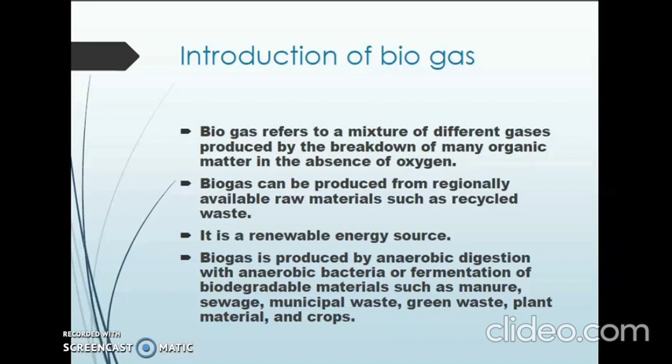Biogas refers to a mixture of different gases produced by the breakdown of organic matter in the absence of oxygen. Biogas can be produced from regionally available raw materials such as recycled waste, and it is a renewable energy source. Biogas is produced by anaerobic digestion with anaerobic bacteria or fermentation of biodegradable materials such as manure, sewage, municipal waste, green waste, plant material and crops.

Let's check into its history. The idea that rotting vegetable matter gives off a flammable gas has been understood since the ancient Persians. In modern times, the first sewage plant was built in Bombay in 1859, an idea that was brought to the UK in 1895 when the gas produced was used to light street lamps. The use of farm manure to generate methane was developed again in Bombay in the 1930s. It was only developed for use by Indian villagers by the Khadi and Village Industries Commission in the early 1960s.

Similarly, China started a program in the 1960s and claimed that 5 million plants had been built by the early 1980s. The design was based on a septic tank.

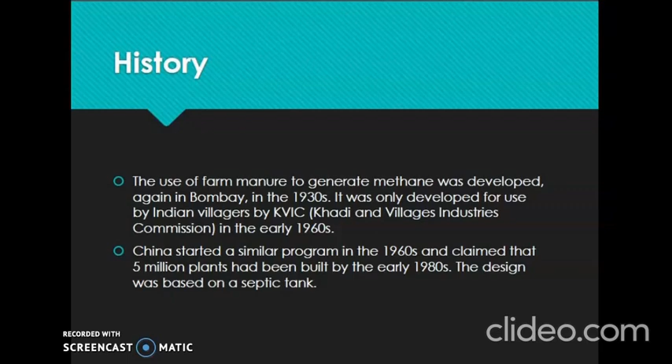Biogas composition: methane makes up 50 to 75% of the biogas composition, followed by carbon dioxide at 25 to 50%, nitrogen 0 to 10%, hydrogen 1 to 5%, oxygen 0.1 to 2%, water vapor between 0 to 10%, hydrogen sulfide 10 to 30,000 parts per million, and ammonia in the range of 0.01 to 2.5 milligrams per meter cubed.

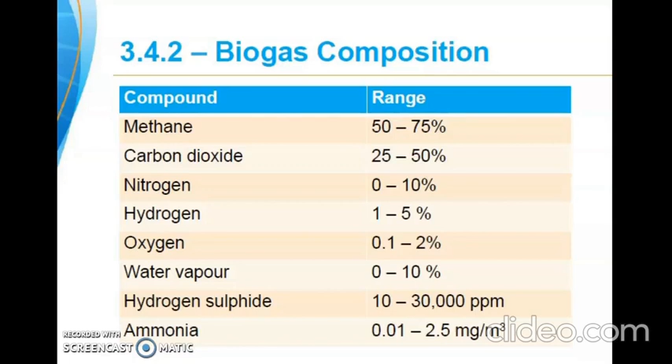Now let's see the typical biogas yield depending upon the feedstock used. When mixed food waste was used, it's between 75 to 200 meter cube per ton. Cattle slurry is between 15 and 25, and same with pig slurry. For poultry litter, it's between 30 and 100, and grass silage is between 160 and 200. If it is maize silage, it's between 200 and 220, and if it's maize grain, it's 560.

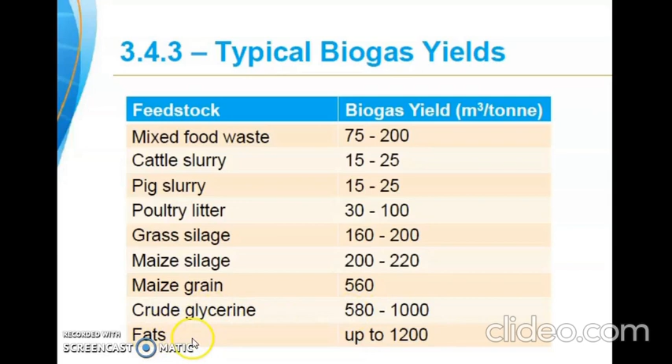When crude glycerin is used, it's between 580 and 1000 meter cube per ton, and the highest was seen when fats were used, ranging up to 1200.

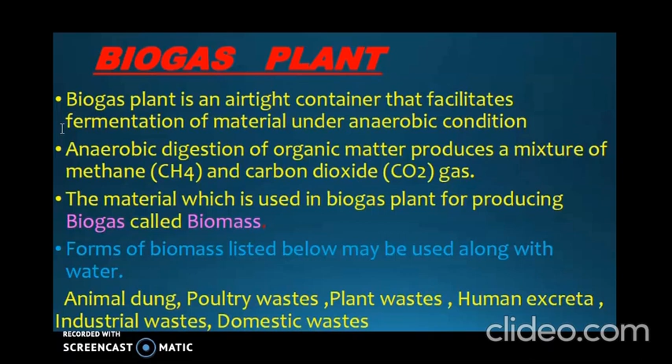So what's a biogas plant? A biogas plant is an airtight container that facilitates the fermentation of material under anaerobic condition. Anaerobic digestion of organic matter produces a mixture of methane and carbon dioxide gas. The material used in a biogas plant for producing biogas is called biomass. Animal dung, poultry waste, plant waste, human excreta, industrial waste and domestic waste are the various forms of biomass that can be used along with water in the biogas plant.

Operational parameters of a biogas plant. The first factor is temperature. Methane forming bacteria works best in a temperature range between 35 to 38 degrees Celsius. The gas production decreases sharply below 20 degrees Celsius and almost stops at 10 degrees Celsius.

Solid to moisture ratio in the biomass: if water content is too high, the mean slurry temperature and gas production drops. If water content is too low, acids accumulate and hinder the fermentation process.

Next is the pH value. During the methane forming stage, pH value is maintained between 6.5 to 7.5.

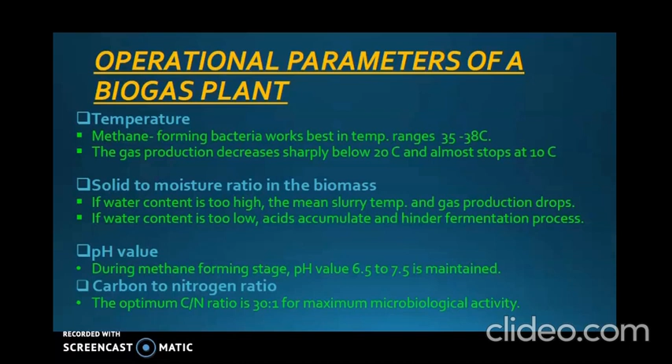Carbon to nitrogen ratio: the optimum carbon to nitrogen ratio is 30:1 for maximum microbiological activity. The total solid content in the material is 18 to 20%, and the diameter to depth ratio is 0.66:1. Uniform feeding of the biomass should be provided, and mixing, stirring, or agitation of the contents of the digester is required.

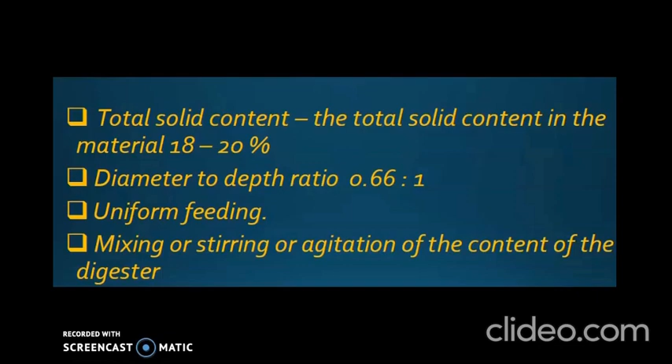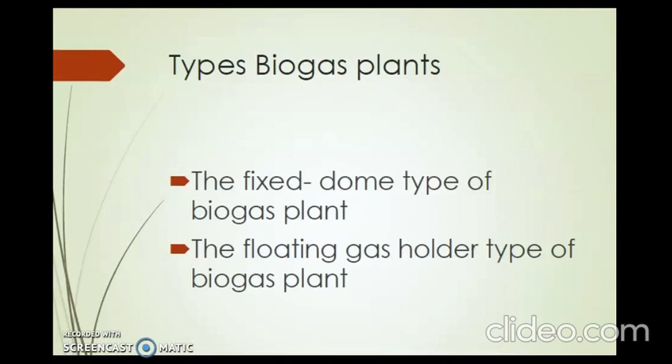Now let's see in detail about the fixed dome type of biogas plant. The raw materials used are animal dung, poultry waste, plant waste, human excreta, industrial waste like sawdust, waste from food processing industries, and domestic waste like vegetable peels and waste food materials. It can be used along with water.

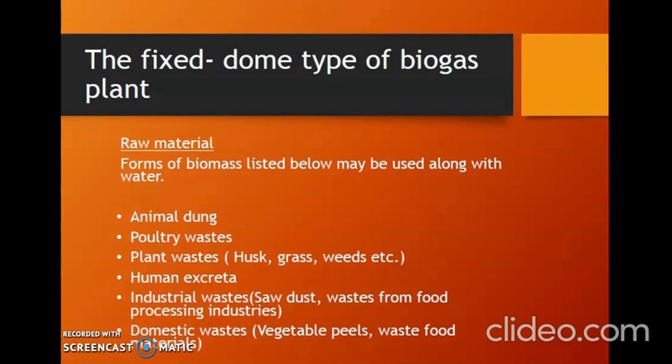In the fixed dome type, biogas is produced as a result of anaerobic fermentation of biomass in the presence of water. The construction of a fixed dome type biogas plant consists of 5 major sections: the mixing tank present above the ground level, the inlet chamber into which the mixing tank opens underground as a sloping inlet chamber, the digester, the outlet chamber, and the overflow tank.

The fixed dome type biogas plant is a brick and cement structure. It consists of a mixing tank present above the ground level, and the mixing tank opens underground into a sloping inlet chamber. The inlet chamber opens from below into the digester, which is a huge tank with a dome-like ceiling. The ceiling of the digester has an outlet with a valve for the supply of biogas. The digester then opens from below into an outlet chamber, and the outlet chamber opens from the top into a small overflow tank.

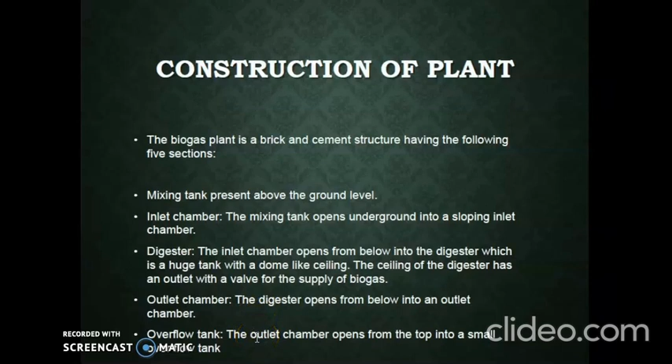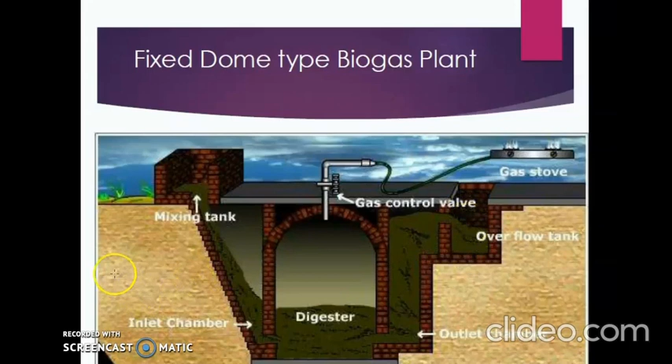You can see the mixing tank, inlet chamber, digester, outlet chamber and the overflow tank here. Now let's see the working of the fixed dome type biogas plant.

The various forms of biomass are mixed with an equal quantity of water in the mixing tank. This forms the slurry, and the slurry is fed into the digester through the inlet chamber. When the digester is partially filled with the slurry, the introduction of slurry is stopped and the plant is left unused for about 2 months.

During these 2 months, anaerobic bacteria present in the slurry decomposes or ferments the biomass in the presence of water. As a result of anaerobic fermentation, biogas is formed which starts collecting in the dome of the digester.

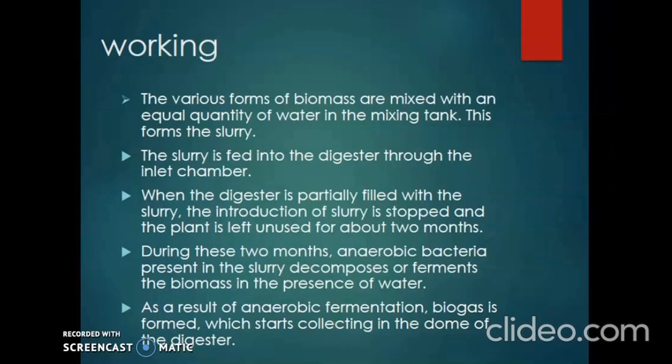As more and more biogas starts collecting, the pressure exerted by the biogas forces the spent slurry into the outlet chamber. From the outlet chamber, the spent slurry overflows into the overflow tank. The spent slurry is manually removed from the overflow tank and used as manure for plants.

The gas valve connected to a system of pipelines is opened when a supply of biogas is required. To obtain a continuous supply of biogas, a functioning plant can be fed continuously with the prepared slurry.

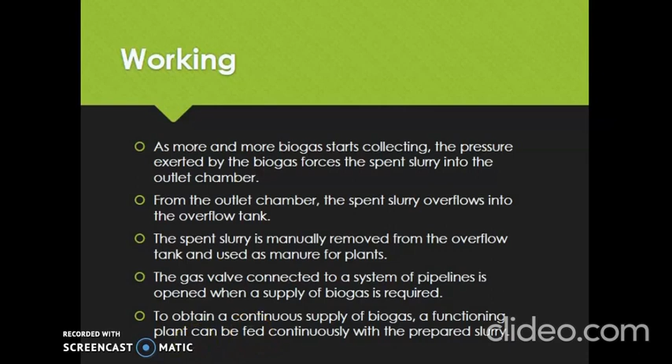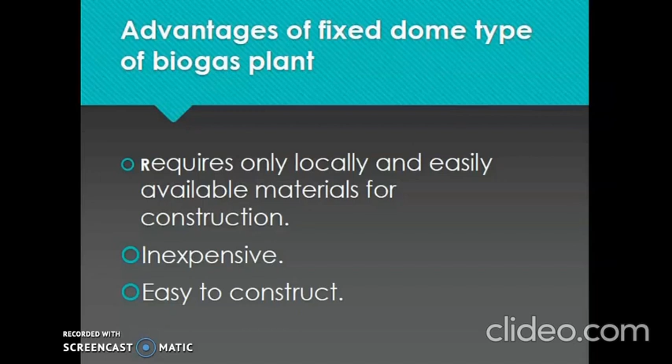Advantages of fixed dome type biogas plant: it requires only locally and easily available materials for construction. It's inexpensive and it is easy to construct.

The second one is a floating dome type biogas plant. You can see the image here. This also consists of a mixing tank, inlet pipe, digester tank, inlet tank, and there is a partition wall in between, and there is an outlet pipe, overflow tank, the gas holder and the gas control valve.

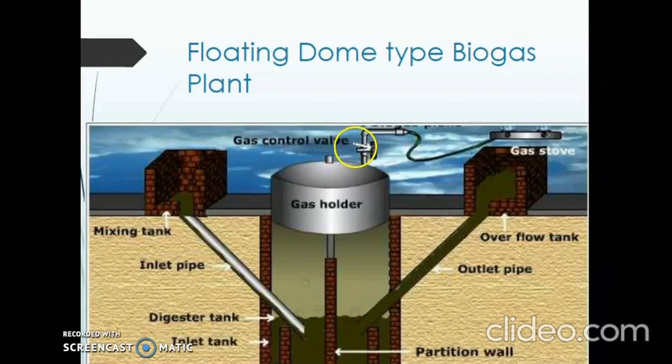Now let's see its construction in detail. In floating gas holder type also, the biogas is produced as a result of anaerobic fermentation of biomass in the presence of water.

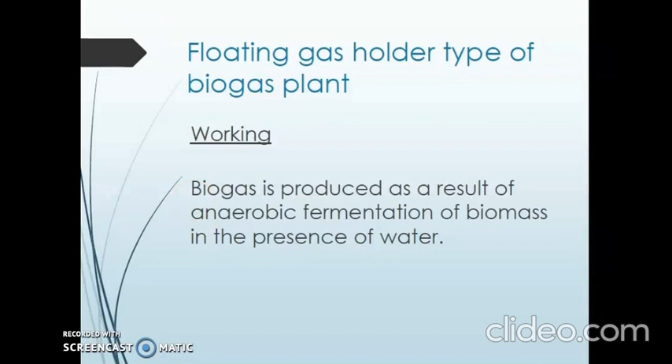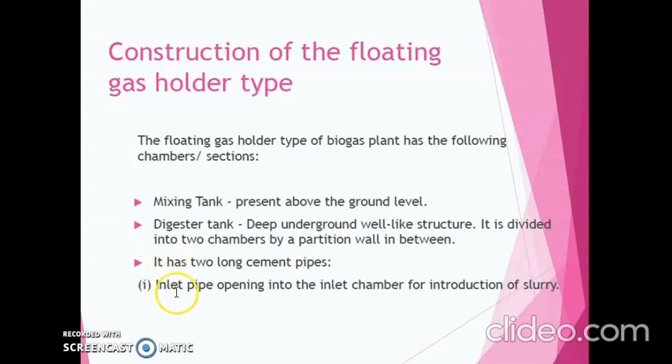Beside that, it has 2 long cement pipes. The first one is the inlet pipe that is opening into the inlet chamber for introduction of slurry, and the second one is the outlet pipe opening into the overflow tank for removal of spent slurry.

Then there is a gas holder, which is an inverted steel drum resting above the digester. The drum can move up and down, and they can float over the digester. The gas holder has an outlet at the top which could be connected to gas stoves. And then there is an overflow tank present above the ground level.

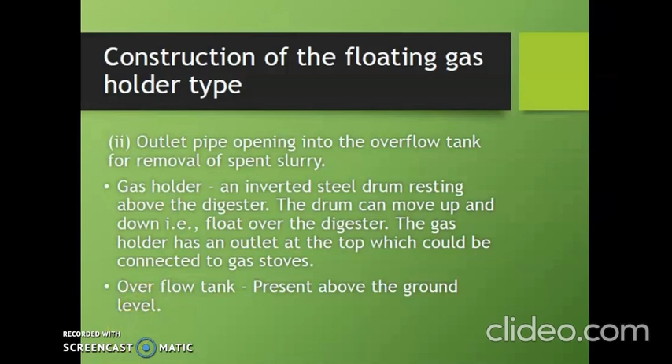Now let's see the working of the floating type. In this, the slurry, which is a mixture of equal quantities of biomass and water, is prepared in the mixing tank. The prepared slurry is fed into the inlet chamber of the digester through the inlet pipe. The plant is left unused for about 2 months and introduction of more slurry is stopped.

During this period, anaerobic fermentation of biomass takes place in the presence of water and produces biogas in the digester. Biogas, being lighter, rises up and starts collecting in the gas holder. The gas holder now starts moving up. The gas holder cannot rise up beyond a certain level.

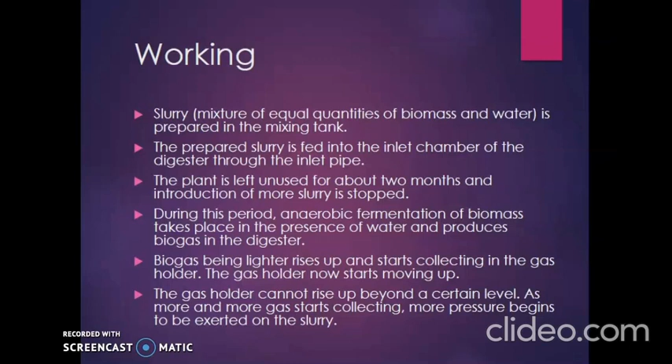As more and more gas starts collecting, more pressure begins to be exerted on the slurry. The spent slurry is now forced into the outlet chamber from the top of the inlet chamber. When the outlet chamber gets filled with the spent slurry, the excess is forced out through the outlet pipe into the overflow tank, and this is later used as manure for plants.

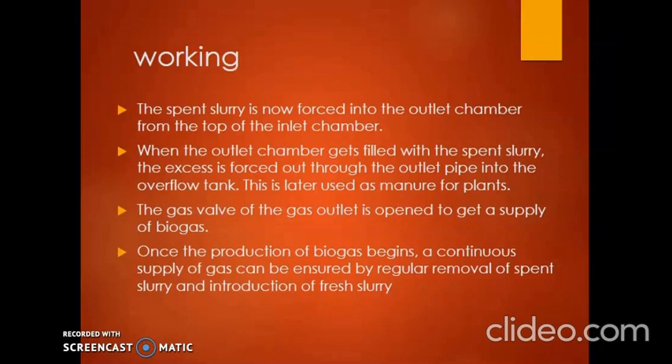The gas valve of the gas outlet is opened to get a supply of biogas. Once the production of biogas begins, a continuous supply of gas can be ensured by regular removal of spent slurry and introduction of fresh slurry. So you can see the working is almost similar to the fixed type.

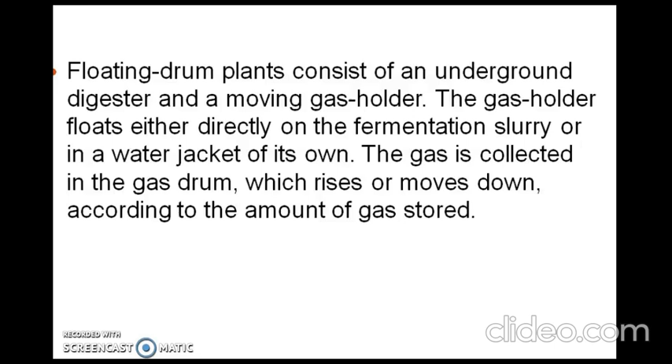The floating drum plants consist of an underground digester and a moving gas holder, and the gas holder floats either directly on the fermentation slurry or in a water jacket of its own. The gas is collected in the gas drum, which rises or moves down according to the amount of gas stored.

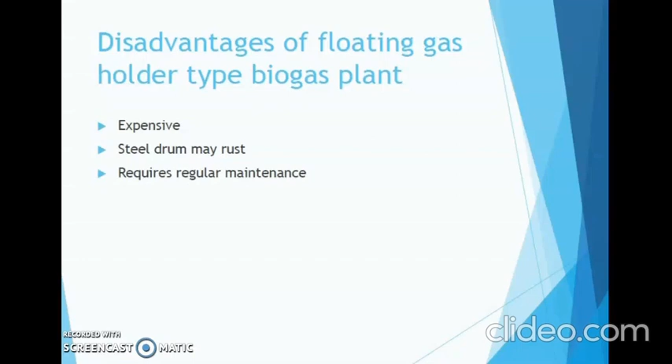Some of the disadvantages of the floating gas holder type biogas plant is that it's expensive. The steel drum that is used may rust, and it requires regular maintenance.

We have already discussed about the fixed type and the floating drum type biogas plant. So there are different types of floating drum plants. That includes the KVIC model with a cylindrical digester. It is the oldest and most widespread floating drum biogas plant from India.

Then there is Pragati model. Then there is Ganesh model made of angular steel and plastic foil. Then there is floating drum plant made of prefabricated reinforced concrete compound units.

Then the floating drum plant made of fiberglass reinforced polyester. There is also low-cost floating drum plants made of plastic water containers or fiberglass drums.

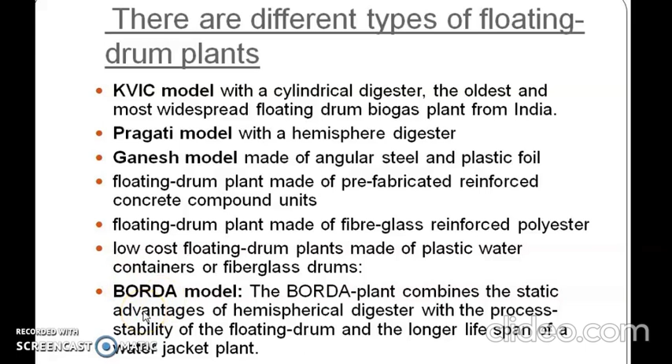Then there is a BORDA model. The BORDA plant combines the static advantages of the hemispherical digester with the process stability of the floating drum, and the longer lifespan of the water jacket plant.

Beside the fixed type and floating drum type, there are other types of biogas plant, like the low-cost polyethylene tube digester. It consists of a tubular polyethylene film bent at each end around a 6-inch PVC drain pipe, and is wound with rubber scrap of recycled tire tubes.

The next one is a balloon plant. A balloon plant consists of a heat-sealed plastic or rubber bag combining digester and gas holder. The gas is stored in the upper part of the balloon, and the inlet and outlet are attached directly to the skin of the balloon.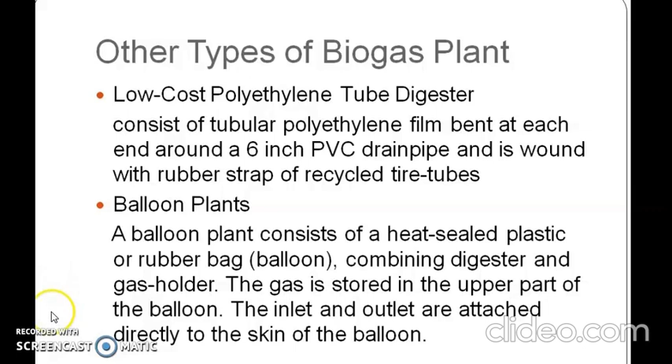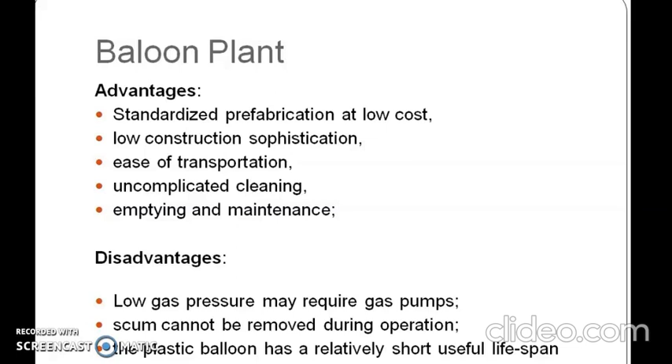Advantages of balloon plant include standardized prefabrication at low cost, low construction sophistication, ease of transportation, uncomplicated cleaning, and easy emptying and maintenance. Disadvantages include low gas pressure that may require gas pumps, and the scum cannot be removed during operation. The plastic balloon also has a relatively short useful lifespan.

The other kind is the earth pit plant. It has low cost of installation and high potential for self-help approaches. Its disadvantages include a short useful life, and earth pit plants can only be recommended for installation in impermeable soil located above the groundwater table.

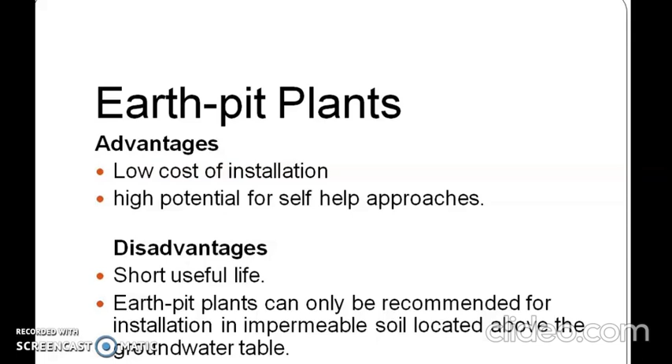Next one is the ferro cement plant. Here the vessel is usually cylindrical and the plants are very small.

Its disadvantages include substantial consumption of essentially good quality cement. Workmanship must meet high quality standards, it uses a substantial amount of expensive wire mesh, and special sealing measures for the gas holder are necessary.

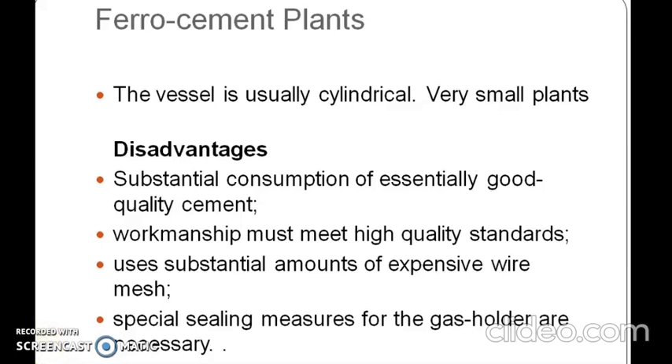Biogas plants are operated based on batch and continuous type. In batch plants, they are filled and then emptied completely after a fixed retention time. Each design and each fermentation material is suitable for batch filling, but batch plants require high labor input. As a major disadvantage, their gas output is not steady.

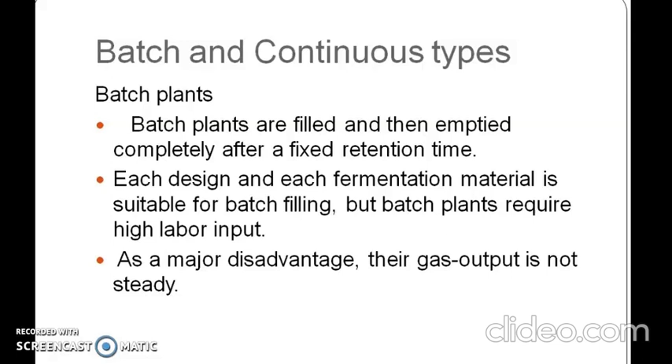Another one is a continuous plant. In continuous plants, it's fed and emptied continuously. They empty automatically through the overflow when new material is filled in. Therefore, the substrate must be fluid and homogeneous. Continuous plants are suitable for rural households as the necessary work fits well in the daily routine. Gas production is constant and higher than in batch plants. Today, nearly all biogas plants are operating on a continuous mode.

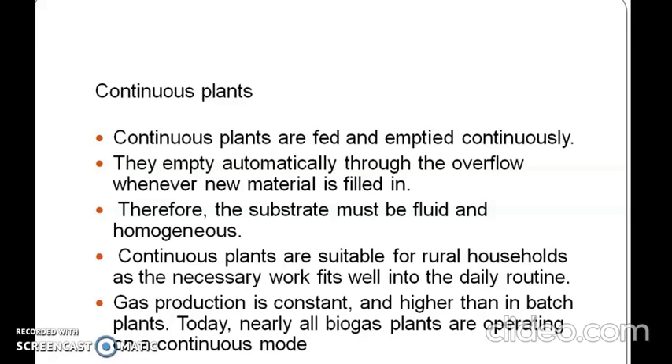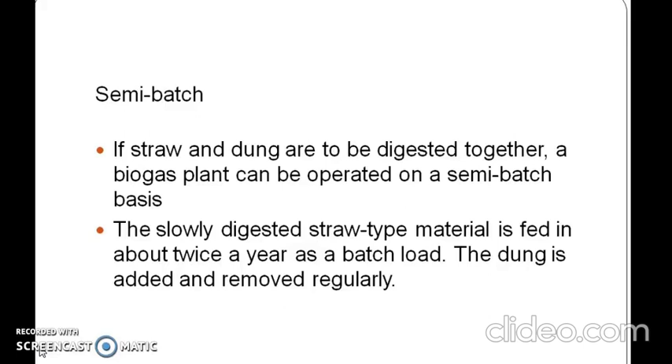There is also a semi-batch type biogas plant. If straw and dung are to be digested together, a biogas plant can be operated on a semi-batch basis. The slowly digested straw type material is fed in about twice a year as a batch load, and the dung is added and removed regularly in a continuous manner.

Biogas produced from the anaerobic digestion process is collected and stored to manage fluctuation in the production and consumption rate. Biogas can be stored in the digestion tank headspace or in a separate storage vessel at low pressure. Once upgraded to biomethane, the gas is pressurized for use.

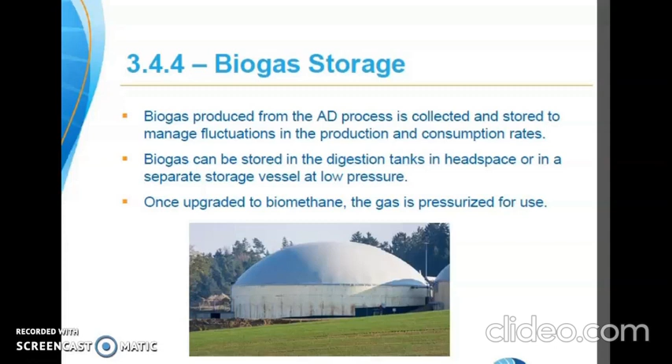Biogas can be used to produce electricity, heat, and for cooling purposes. Biogas can be burned directly. However, impurities can cause maintenance issues. Without removal, hydrogen sulfide and water can cause maintenance issues such as corrosion and affect its efficiency.

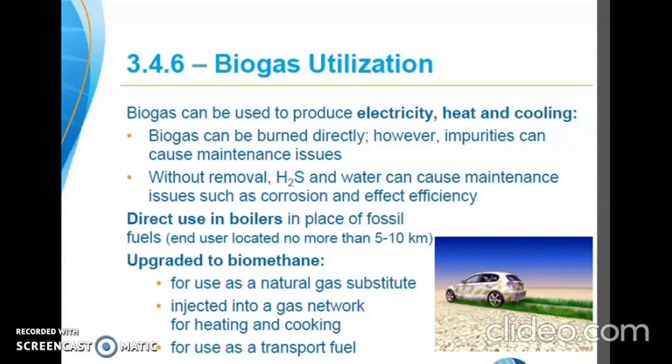It can be used in boilers in place of fossil fuels. When upgraded to biomethane, it can be used as a natural gas substitute. It can be injected into a gas network for heating and cooking. It can also be used as a transport fuel. So biogas, when upgraded to biomethane, can be used as a transport fuel and for gas injection.

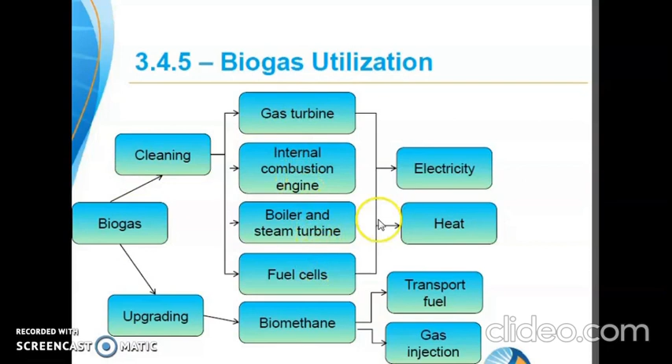And when they are removed of the impurities, it can be used in gas turbines, internal combustion engines, boilers and steam turbines, and in fuel cells, thereby generating electricity and heat.

Depending on the intended use of the biogas, it may be cleaned or upgraded. Its organics, water and CO2 can be removed, and the hydrogen sulfide can be reduced to 5 parts per million. The techniques used for this include biological desulfurization, oxidation, physical absorption, water scrubbing, chemical absorption, pressure swing adsorption, and membrane separation.

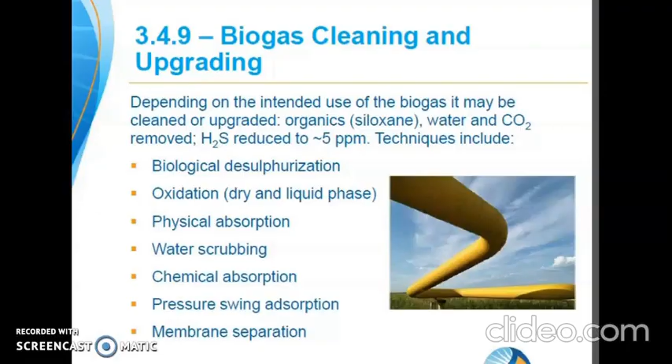Now let's see a few of the advantages and disadvantages of biogas. It's eco-friendly, and production of biogas by biogas plants provides employment. It produces organic fertilizer that can be used in agriculture purposes. It is simple and low-cost technology, and it reduces the greenhouse effect.

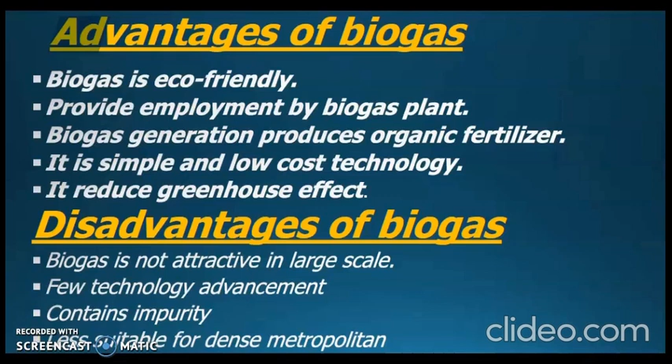Coming to the disadvantages, it is not attractive on a large scale, and there is only a little technological advancement. It may contain impurities if not treated, and it is not suitable for dense metropolitan populations.

Biogas can be utilized for cooking, lighting, operating small engines and for pumping water, and the size of the biogas plant depends upon the size of the family and the purpose for which biogas is utilized.

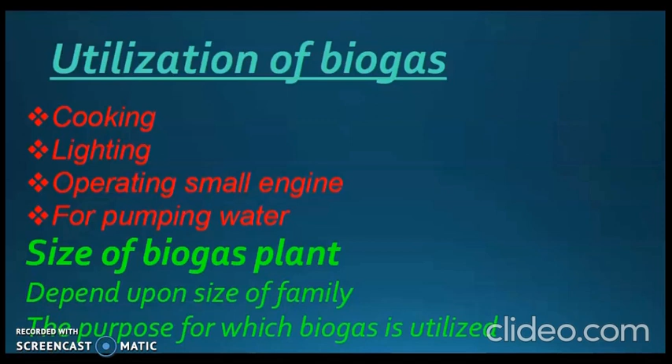Let's see a few advantages of biogas as a fuel. It has high calorific value, it's a clean fuel, no residue is produced and no smoke is produced, it's non-polluting. It's economical, it can be supplied through pipelines, and it burns readily with a convenient ignition temperature.

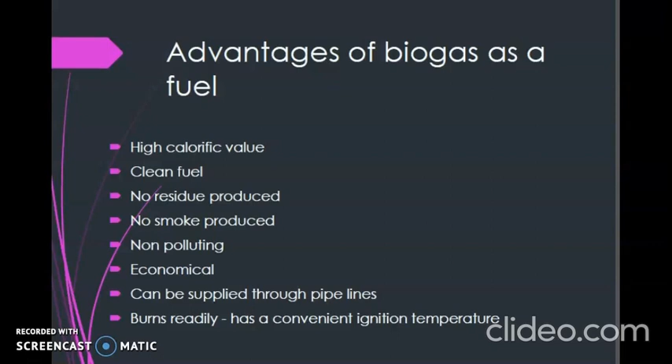A few advantages of biogas plants: it reduces burden on forest and fossil fuels, it produces a clean fuel and helps in controlling air pollution, it provides nutrient-rich manure for plants, and it controls water pollution by decomposing sewage, animal dung and human excreta.

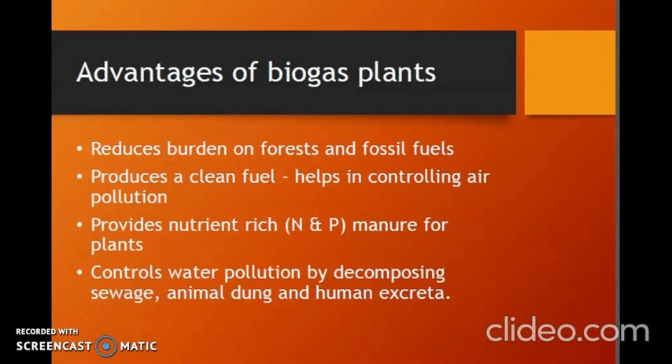A few limitations of the biogas plant are that its initial cost of installation is high, and the number of cattle owned by an average family of farmers is inadequate to feed a biogas plant.

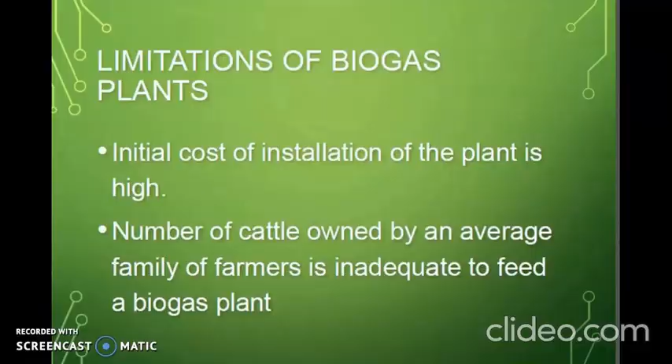Now let's see its potential environmental benefits. It reduces reliance on fossil fuels, it diverts waste from landfill, it reduces greenhouse gas emissions, provides a valuable fertilizer or soil improver, reduces reliance on chemical fertilizers and associated production emissions, can reduce odor intensity of waste, and reduces pathogens and weed seeds.

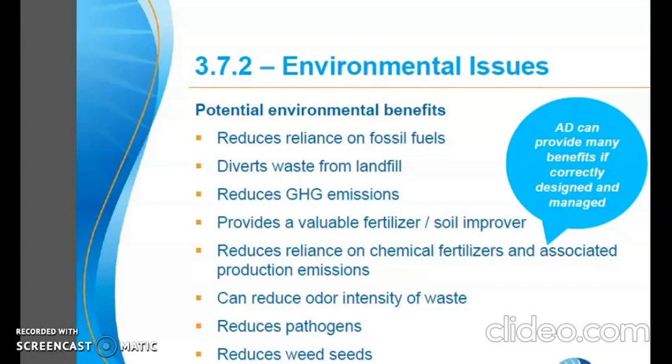It is also having a negative impact on the environment if not properly managed. The first one is odor - the feedstocks can cause odorous emissions, and this can be managed through an odor management plan and suitable control and abatement techniques, for example, inside storage.

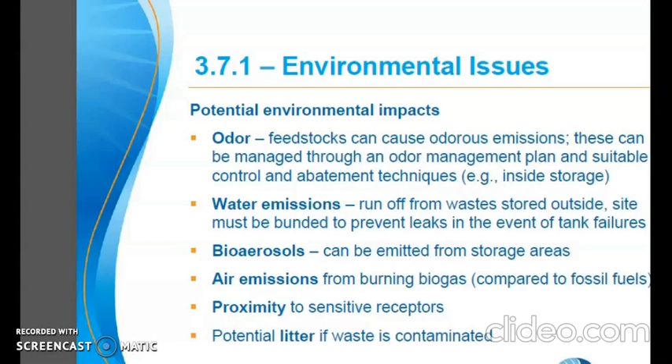Next is water emissions - runoff from waste stored outside. The site must be bunded to prevent leaks in the event of tank failures. Next is the emission of bioaerosols from storage areas, then air emissions from burning biogas, and the proximity to sensitive receptors and potential litter if waste is contaminated.

Solid waste management is a process of removal of solid waste in such a manner that it does not cause any problem to the environment and living organisms. It is done through different methods as per the category of solid waste.

We have already discussed a number of methods like landfills, encapsulation, incineration, anaerobic digestion, composting, vermicomposting, methanogenesis, and the production of biogas from solid waste.

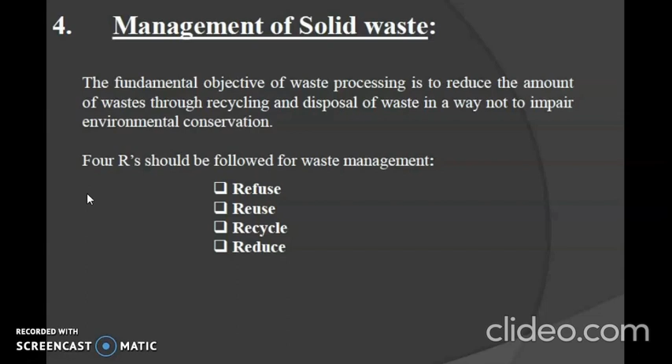The fundamental objective of waste processing is to reduce the amount of waste through recycling and disposal of waste in a way not to impair environmental conservation. The 4 R's should be followed for waste management: refuse, reuse, recycle and reduce.

The management of solid waste is done according to its nature, like the management of medical solid waste, management of non-degradable solid waste, management of hazardous waste, management of non-hazardous and biodegradable waste, and management of electronic waste.

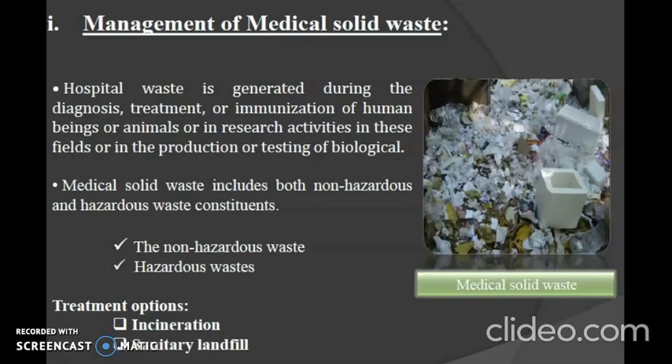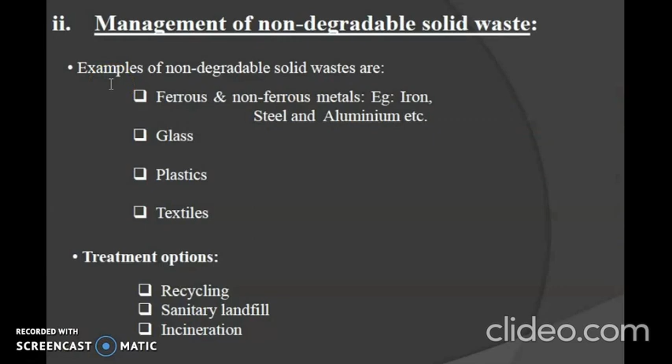Hospital waste is generated during the diagnosis, treatment or immunization of human beings or animals, or in research activities. These include both non-hazardous and hazardous waste, and treatment options are incineration and sanitary landfill. Examples of non-degradable solid waste include steel, aluminium, iron, glass, plastic, and textiles, with treatment options being recycling, sanitary landfill, and incineration.

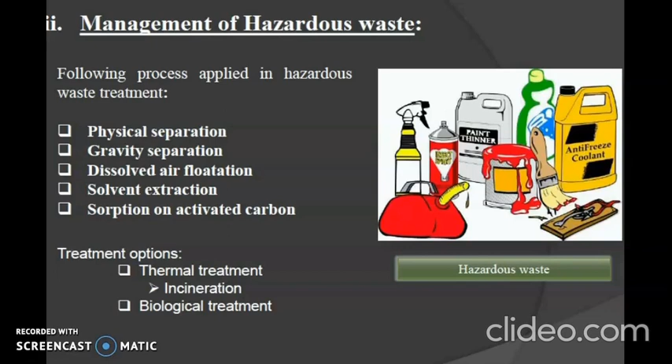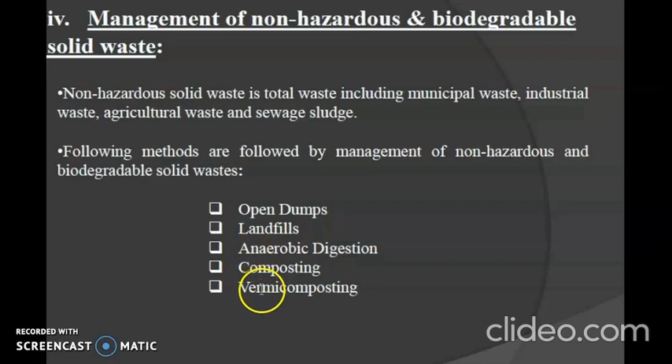Management for hazardous waste includes processes like physical separation, gravity separation, dissolved air flotation, solvent extraction, and sorption on activated carbon, with treatment options including thermal treatment like incineration, and biological treatment can also be applied. For non-hazardous and biodegradable solid waste, we can use open dumps, landfills, anaerobic digestion, composting, and vermicomposting methods. The next major concern is management of electronic waste or e-waste.

It has toxicity and carcinogenicity because of the substances it releases if processed improperly. The toxic substances in electronic waste include lead, mercury and cadmium. Carcinogenic substances in electronic waste may include polychlorinated biphenyls or PCBs. A typical computer may contain more than 6% lead by weight.

Capacitors, transformers, PVC insulated wires containing polychlorinated biphenyls.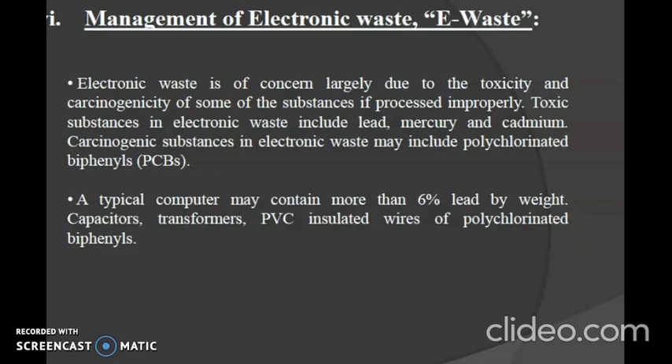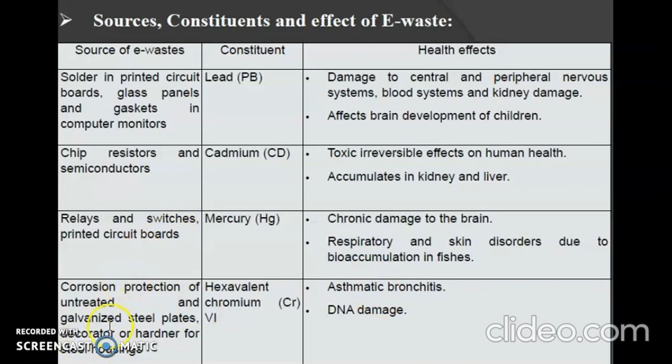You can see that constituents like lead, cadmium, and mercury released from e-waste cause significant damage to human health, affecting the blood system, causing kidney damage, affecting the central nervous system, accumulating in kidney and liver, and causing asthmatic bronchitis. So proper management of e-waste is highly recommended and necessary.

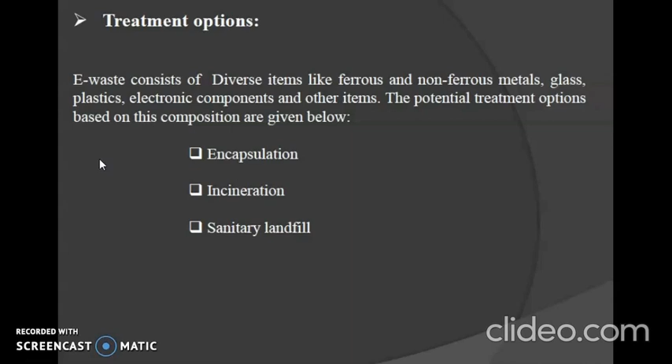Since e-waste consists of diverse items like ferrous and non-ferrous metals, glass, plastics, electronic components and other items, the potential treatment options based on this composition are encapsulation, incineration, and sanitary landfill. Also, reusing electronic waste in a creative and innovative way is a good idea - you can see a stool formed from a whole lot of electronic junk.